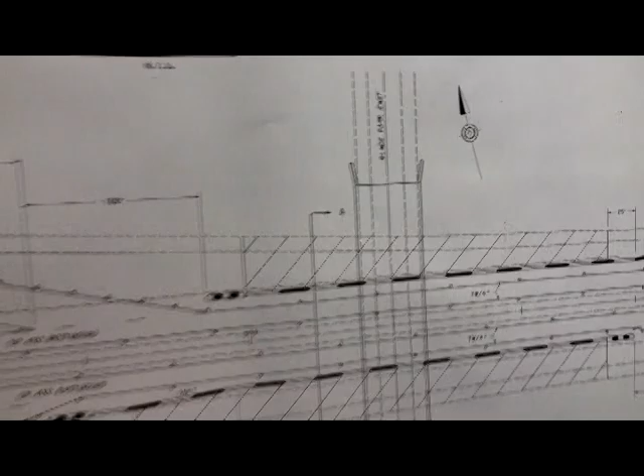Alright. Shown down here is the West Hills Bridge spanning State Route 422. We have 422 westbound traffic, 422 eastbound traffic. That's our plan view. There will be traffic impacts to 422. Up here, this is the bridge, 422. So we're standing on 422, basically looking in at the paper.

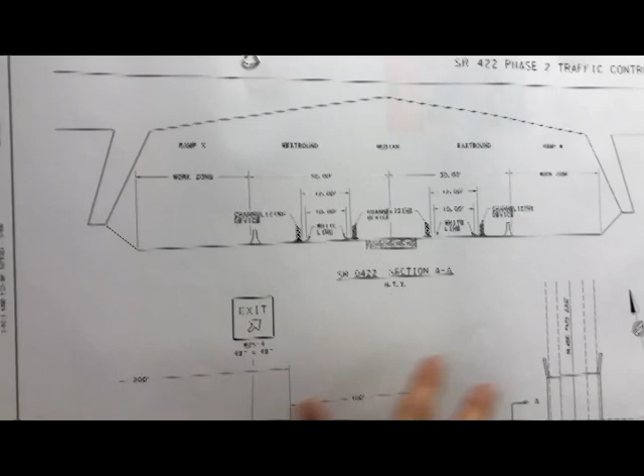During this phase of construction, which we call phase two, there's going to be a work zone basically on the outside of the bridge. So this section of the bridge here and this section of the bridge here will be worked on, primarily painting at this point. There's gonna be a lot of bridge painting. It'll look like a new structure. There won't be any new steel. It's gonna be a paint project.

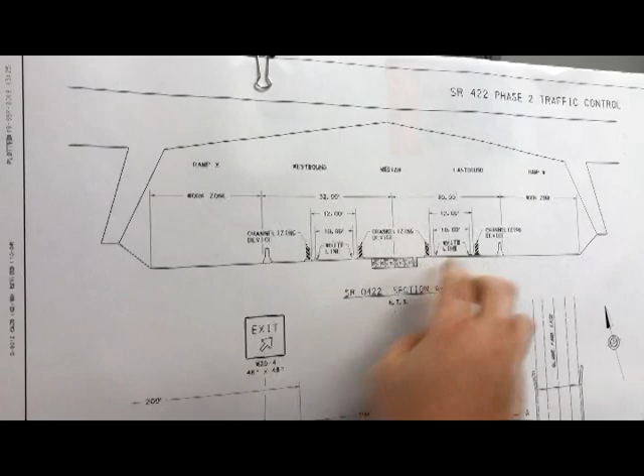During the painting, traffic will be shown by 12-foot lanes here, 12-foot lanes here with channelizing devices, some concrete barrier to protect the workers, and there'll be some staging going on in there. And this is, again, the phase two of the traffic control plan. The other phase is shown on this drawing over here. Okay.

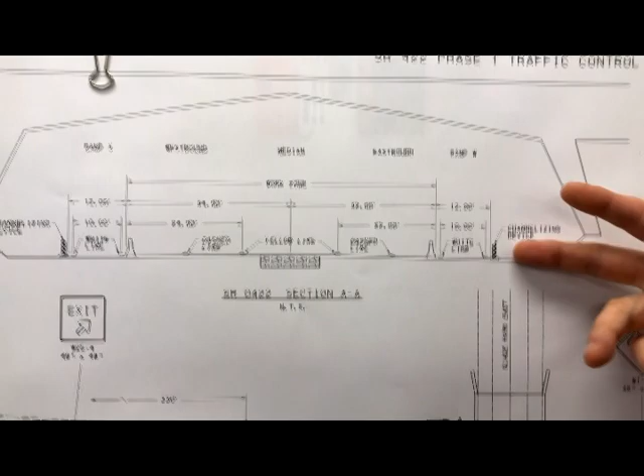It's a very, very similar concept now where the work zone is on the inside of the bridge. So this section from here to over here will now be worked on, and the traffic will be on the outside. 12-foot lanes, 12-foot lanes with concrete barrier, and then the channelizing devices there. Channelizing devices are easier to maneuver in case there's a wide load coming through on 422. The contractor is able to maneuver these a little bit better. And of course, the concrete barrier is a safe barrier for the workers' protection.

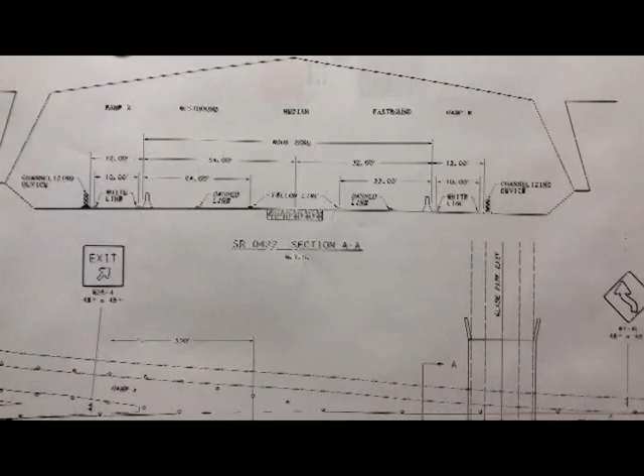Now, these are single lanes on both sides of that bridge. Correct. So basically, what you're doing is you're bringing down the 2 lanes of traffic into a single lane to go under the bridge. But there's no decking on this. There's no changes to the decking. No. So this is all just a paint project, mainly. Paint project with minor repairs to the pedestals, just some concrete spalls. There'll be some minor deck repair. It's not a full deck replacement. No steel, no structural steel repairs at this point.

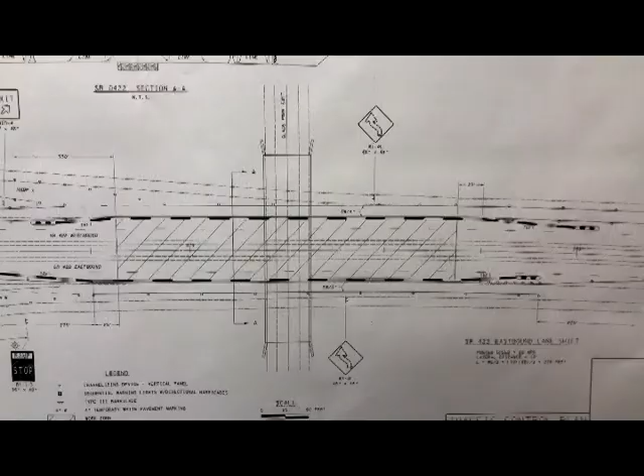So it's not going to impact basically any of the traffic coming off those exits, because they can still pass to go to the hospital. Right. There may be some flaggers on both sides of the bridge, allowing traffic to come in and out. Not going to be long term. If it was long term, we'd do temporary signals. We don't anticipate the need for temporary signals here. Flaggers have more flexibility in case there's an ambulance or fire truck going through the area, especially with the ambulance and the hospital being nearby. We wanted to give the contractor the flexibility to see the oncoming ambulance, per se, and get them through.

And when do you anticipate to start this? Spring of 2020. Okay, so well over a year. Yes. And how long will it take to complete? A full season. It's going to be spring to fall. Okay. And do you think there's going to be any changes? Is this pretty much a set in stone plan, or? I'd say 90% set, sure. Now, if something comes up, we will be inspecting the bridge again. If there's additional deficiencies that we find, we will be fixing those.

This is a unique bridge in that the county owns it. PennDOT doesn't own this structure. Armstrong County does. So we're doing the design in District 10. Our own design unit is handling the design. I'm managing the project. And then with the construction, there'll be some cost sharing with the county, state, and federal funding sources. Do you know the total amount of this project? 1.9 million. Okay. So when you say cost sharing with the county, approximately what would they have to come up with? Around 5%. Okay. All right.

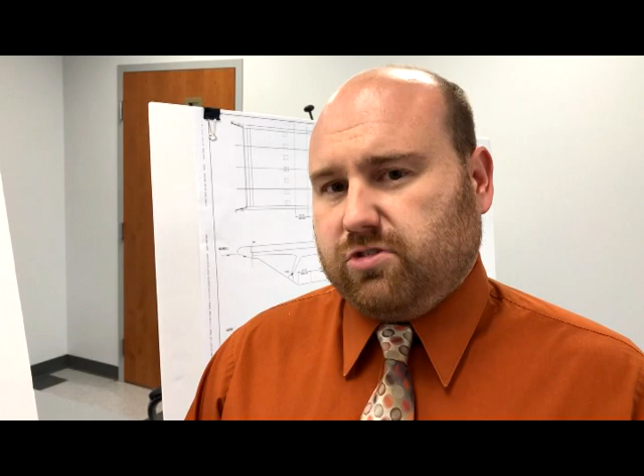It's a K-frame structure is the name of it, and it's very difficult to do a significant amount of work without closing it. It connects similar to a truss, and trusses are also another type of structure that's very difficult to work on for any substantial structural repairs. Our goal is to not close this bridge and keep traffic open the whole time.

Now, was this identified, because I know you're going around the counties and all the different districts and you're identifying bridges that are deficient. Was this deficient or just in need of some maintenance so it doesn't become deficient? Correct. It's preventative maintenance. We want it to not become poor. The new term PennDOT's using right now is poor. We're starting to get away from the term structurally deficient. It was not in a poor condition yet, so the preventative maintenance project allows us to continue the service life without it being in a poor condition.